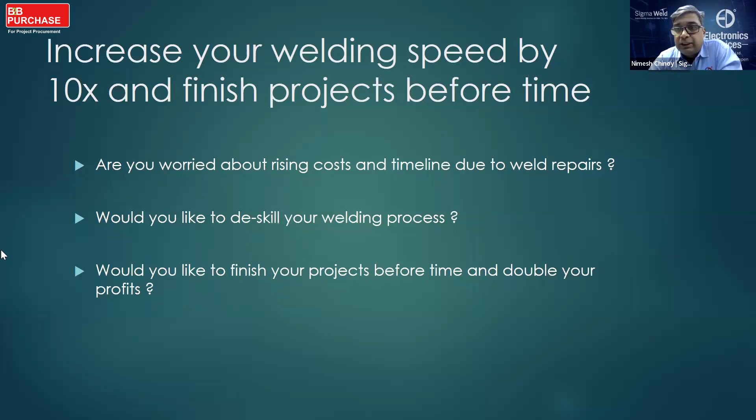If these are few things that worry you - worried about rising cost and timeline due to weld repairs - would you like to de-skill your welding process? Would you like to finish your projects before time and double your profits? If this is something that interests you, then we'll probably be at the right place.

Quickly, this is for production heads, factory managers, welding engineers, owners of stainless steel and exotic material fabricating companies who are into pressure vessels, limpets, dish ends, cryogenic vessels, aerospace components kind of welding, and anyone welding long seam or circular seam with GTAW process. So our focus today would be on TIG welding.

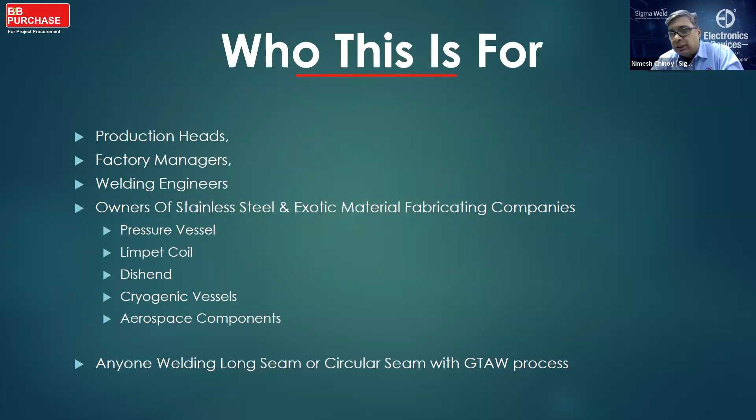What are we promising you today? At the end of this session, you should be able to bring down your welding time by about 90%, bring down your welding repairs by 99%, bring down your welding consumable cost by about 85%, and save more than 75% on your welding cost per meter.

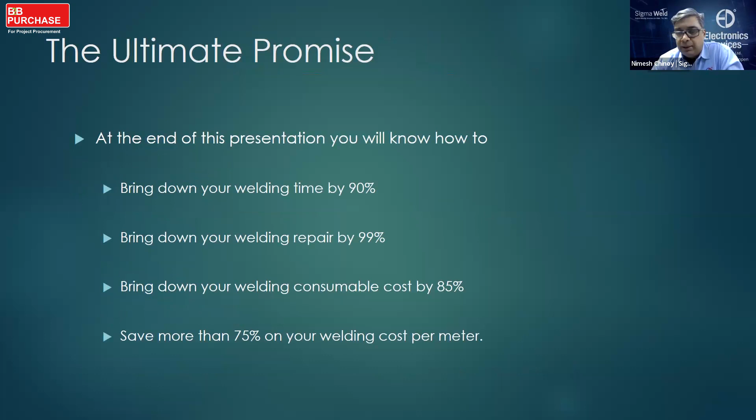A little bit about me - I think Sashi has already shared. I have got more than 20 years of experience in application engineering, in the field of welding and induction heating. I've authored more than 100 technical papers on welding, which have been published at various national and international conferences. I've been awarded the best welding technical paper at the National Welding Meet, and our paper on aerospace welding was selected for the Welding World magazine. I'm also the Honorary Secretary of the Association of Welding Product Manufacturers of India. I represent the Bureau of Indian Standards, the Electric Welding Equipment Sectional Committee, ETD 21, and I'm the Industrial Corporate Member Representative for the Indian Institute of Welding, and I'm on the Core Committee of Welding for the Confederation of Indian Industries, CII.

Very quick about the journey of our company, Electronics Devices, established in 1974 and all the way up to 2023. We've been always innovating and adding new products, from dielectric preheaters to induction heating equipments to induction cap sealers in India. We had a JV with an Italian company for induction heaters in '91. Today we fully own that company and have an export presence in about 80 countries.

We established our full-fledged R&D department in the year 2000. In 2007, we launched the first set of India's digital welding inverters under the brand name of Sigma Weld. In 2010, we extended our manufacturing capacities from Mumbai to Umargaon, which is a part of Gujarat. And we professionalized our company in 2012 from a partnership to a private limited company.

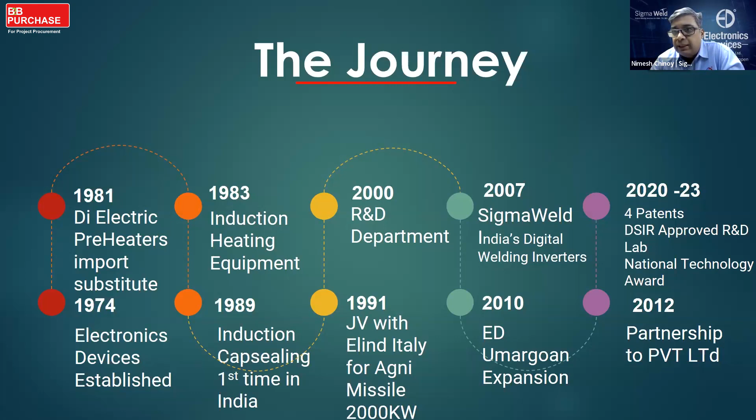I'm happy to say that over the last couple of years, we got more than 4 patents. Our company has been awarded and recognized as the DSIR approved lab by the Government of India, that is the Department of Scientific and Industrial Research. And we've won the National Technology Award this year.

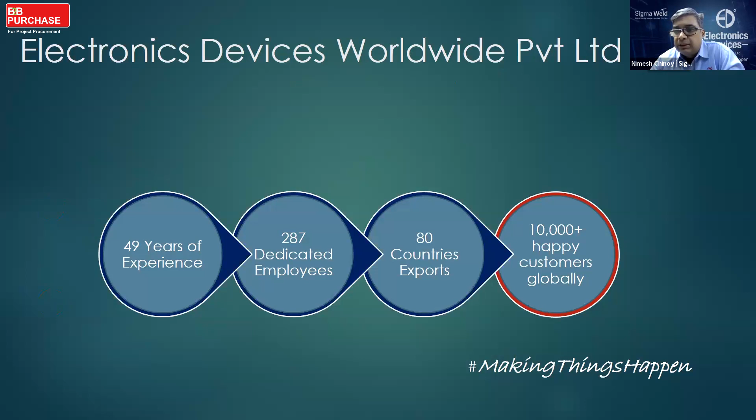In short, 49 years of experience for Electronics Devices, 287 dedicated employees, 80 countries plus exports, and 10,000 plus happy customers globally. A few of our contributions: Chandrayaan 1-2 solid fuel boosters welding was done by Sigma Weld equipments.

The Gaganyaan semi-cryo engine heat treatment procedure is developed by us. The titanium bundles welding and end-pin pre and post weld heat treatment used for all 6 nuclear submarines guarding Indian waters were done by us. More than 100 kilometers of welding of aluminum foot-over bridges for defense.

All the safes and lockers used by Godrej have been manufactured on Sigma Weld since 2007. Nuclear end-shield welding automation for the NPCIL, and critical repair joint for the first PFBR Bhavini project, which is a nuclear power plant - that project also we've done some major repair work for them.

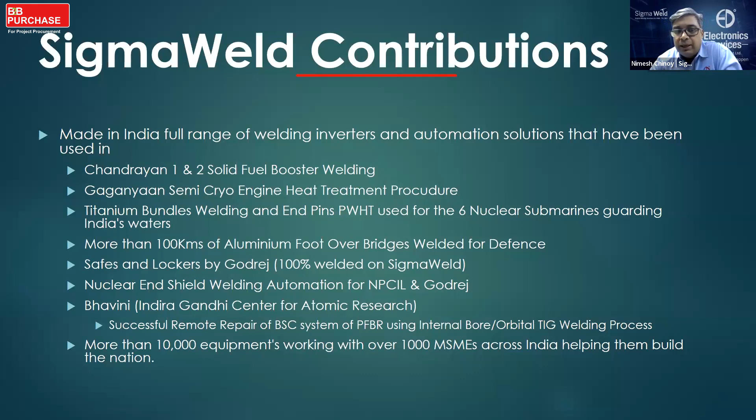Let's come back to our topic for the day, that is looking at TIG welding and its advantages. We all know that it's one of the best processes. It's very clean, one of the best processes, one of the most good-looking beads you can get, with no spatters. You can weld in all positions, and it's possible to automate.

However, we always talk about TIG welding being slow, lacking arc stiffness, having low depth of penetration, and increased heat affected zone. You need a very skilled operator, and you have stub-end losses, that is 10% of your consumable thrown away because the operator cannot feed it in time. Therefore, the process is considered or deemed to be expensive.

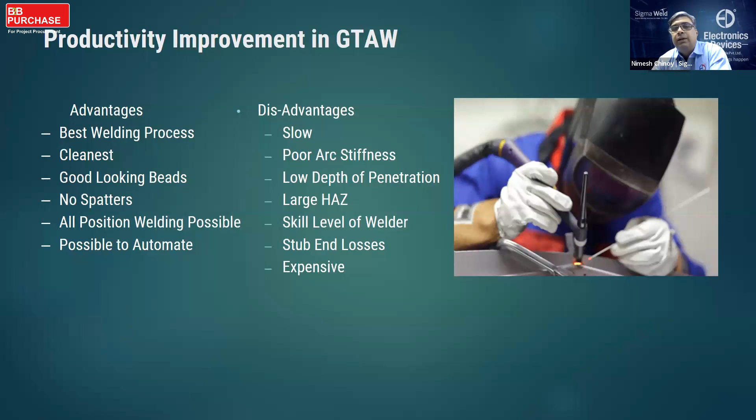When you decide to do any kind of welding on a plate or a rolled shell, you have to make an edge preparation, meaning you have to spend time creating the right bevel angle and root face. If you do it manually using grinding, it's normally slow with inconsistent root faces. But if you do it with a machine, that is a beveling machine or a milling machine, you will always have consistency on the bevel angle and root face, and by doing this, you will always be able to save time.

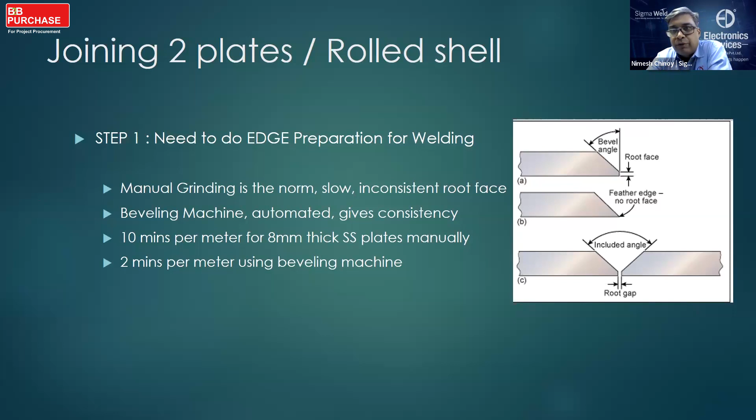For example, if you're using manual grinding for an 8 mm thick stainless steel plate, you would require around 10 minutes. But if you did it with beveling equipment, you would do it in under 2 minutes. So first, if you do it with equipment, you always get consistency and save a lot of time. Second, once the step is ready, you need to weld.

Manual welding speeds are typically in the range of 60 to 200 millimeters a minute with a little bit of automation. The filler wire required to do this is close to about 350 grams per meter for an 8 mm thick plate. It's a small calculator.

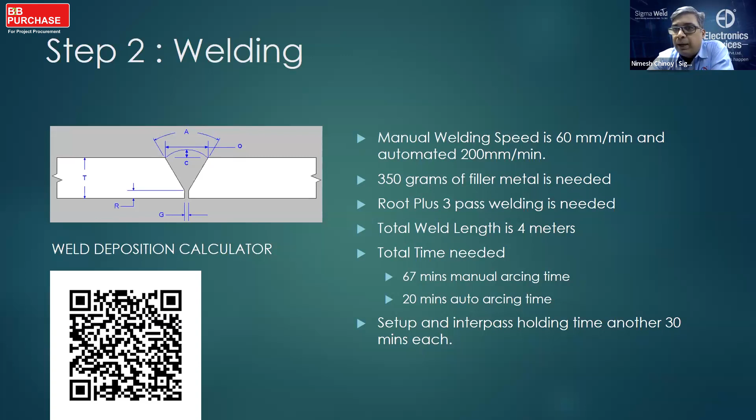Typically, if you want to do a 1 meter weld for an 8 mm thickness, you need 3 passes, root plus 3, that means a total of 4 passes. So 1 meter results in 4 meters of welding. Total time needed is 67 minutes by manual and 20 minutes in automation. Setup time and interpass holding time, another 30 minutes each, will be required because you cannot weld consecutively back to back, otherwise you have overheated material and it can bend or distort.

If you move into semi-automatic GTAW, you can start feeding with a wire spool instead of using cut lengths of wire. It helps you have a single roll instead of multiple dimensions of filler wires. It avoids frequent start-stop of the filler wire, and it avoids post-weld grinding of the overlaps. Most of the failures you get, that is lack of fusion, lack of penetration, happen at overlaps. So if you reduce overlaps, you reduce your chances of failure.

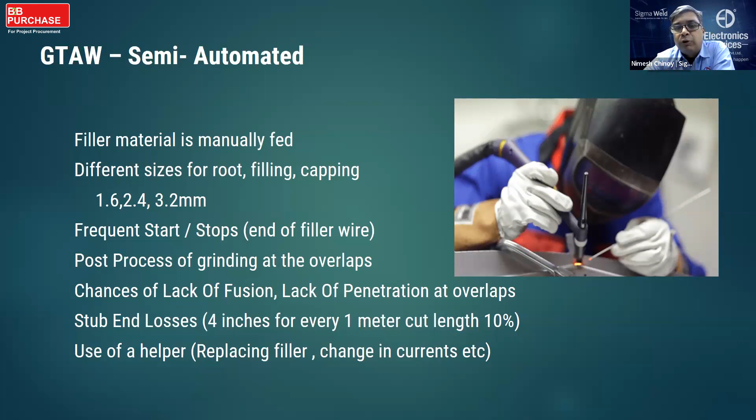You have stub-end losses. That means for every 1 meter cut length, you lose about 100 millimeters or 10 centimeters because the operator cannot reach the arc that far, and therefore that's 10% of your cost of consumable throughout the project. Also, you need a helper to replace the filler wires or change currents.

Let's consider one project for you. If you were to make a storage tank of 1.6 meter diameter and 10 meter length, as you see in the bottom figure, you would have 5 segments to weld of 2 meters length each and 1.6 meter diameter. This means you would have 6 circular seams to be welded with a total weld length of about 160 meters, and you would have 2 meters into 4 passes each, as discussed before, for 5 seams.

This gives you 40 meters of weld length on the long seam. And for the circular seam, 1.6 meter diameter, it would consume 1.6 into 3.14 into 4 passes each into 6 seams, giving 120 meters, so a total length of about 160 meters. Manually welding this would take close to 44.6 hours. If you do it with automation, it would take about 13.33 hours. So this is the difference you will get.

To add to it, filler material required is about 56 kgs. 10% of this, if you were doing manual, that's 5.6 kgs, would go to waste. So you would have to buy more than 60 kgs to actually deposit 56 kgs. The number of machines to be added, and number of skilled personnel, would depend on the number of tanks you have to make.

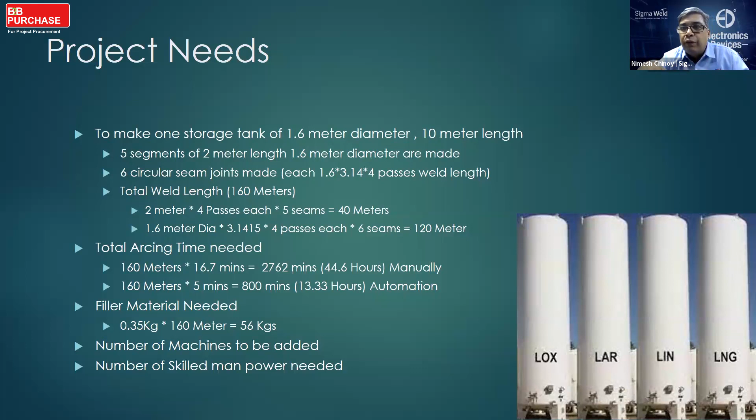You can assume if you are only able to produce one shell in 13 hours, plus you need to wait an equal amount of time for the interpass, that means 26 hours of arcing time, close to 4 to 5 shifts of welding time required per job. But this still takes a lot of time considering edge preparation, welding with filler wire.

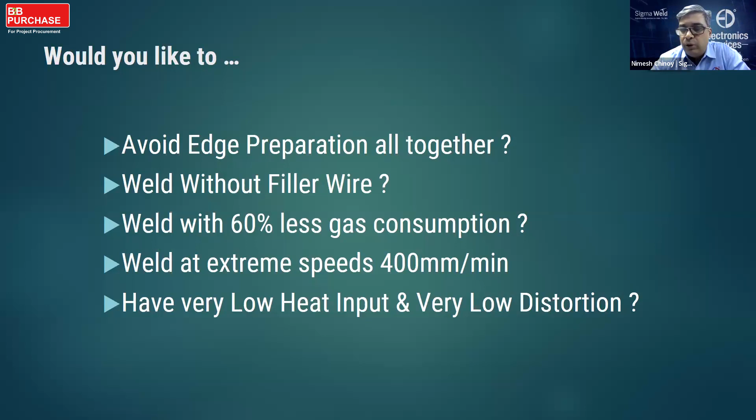We can do something called keyhole TIG welding. When you do keyhole TIG, the arc is constricted, you get a more focused area and deeper penetration. The arc is so focused that you get 3 times the arc force required. Therefore, you have larger penetration and lower heat input.

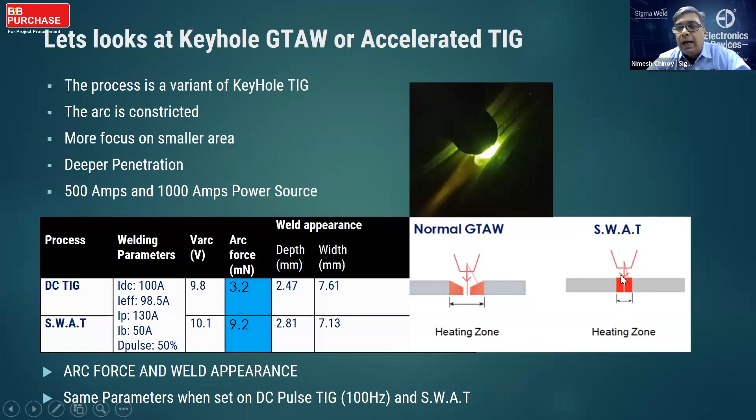This is how it works. You need a torch, and you need square butts on two plates. As they move forward, you will have a keyhole punctured right through. There will be protection on the bottom with purging gas that holds the bottom together, and from the top, using surface tension, the molten pool will move further. Because you are not adding any filler wire, the base metal and the weldment have the same tensile strength. So it's very good.

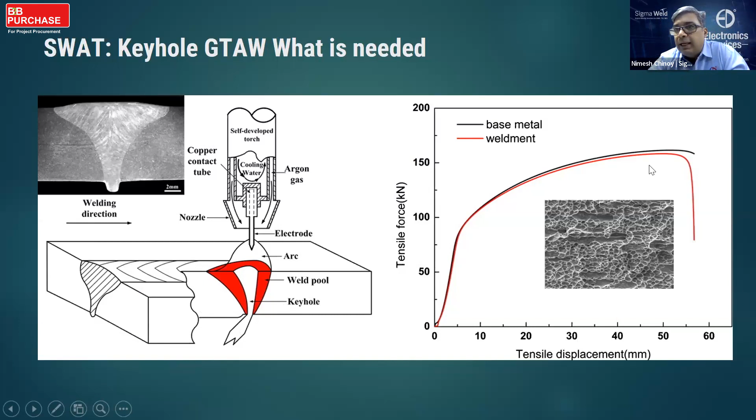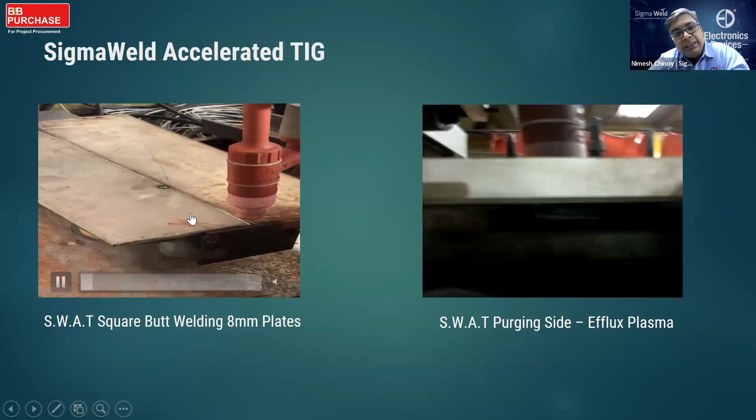A quick video to show you how this looks in real time. This is the top version. You can see there's an 8 mm plate, no edge preparation done. A normal simple torch, as you can see, water cooled, no clamping. I'll just fast forward this a bit for you.

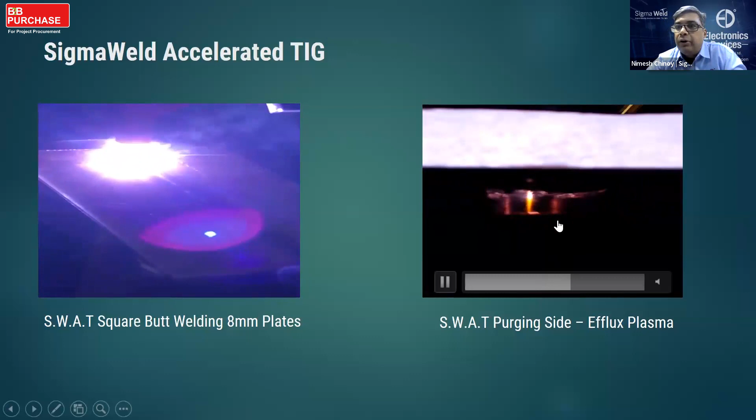You can see this is working at about 400 millimeters a minute. On the bottom, on the other side, you are seeing gas exit from the bottom. This is what is called efflux plasma, which shows you that the penetration is full and complete, and it releases all the gases from the bottom side. Once the welding is complete, you can see a full, clear penetration joint, and this helps you avoid any kind of confusion at all.

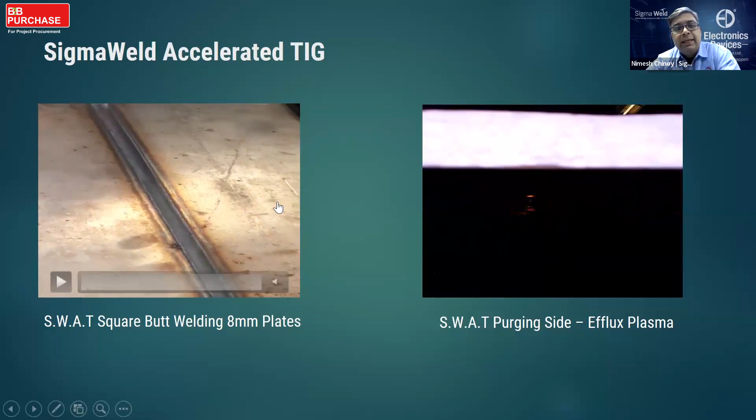This can be used for long seams, circular seams, tube mills. You can weld stainless steel, duplex stainless steel, titanium, nickel alloys, stellite alloys, and to a certain extent carbon steel, all in a single pass up to 10 and 12 millimeters.

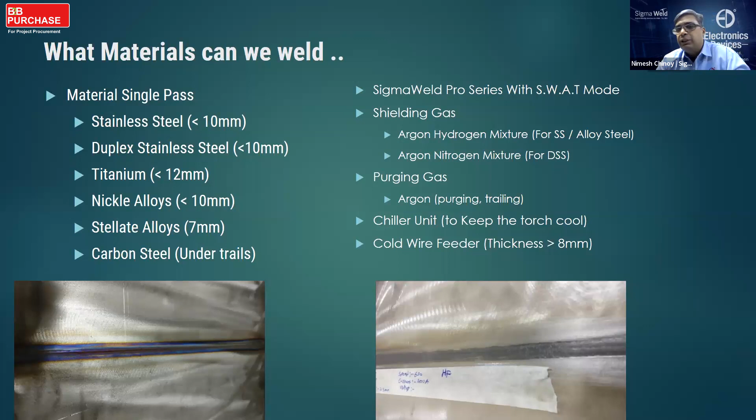What you will need is a Pro Series equipment from Sigma Weld with a SWAT mode on it. You need to choose the gas - argon-hydrogen mixture for stainless steel or alloy steel, argon-nitrogen mixture for duplex stainless steel or super duplex. Purging gas can be argon altogether. You can use a chiller unit to keep the torch cool if you're welding longer seams together. And if you're welding more than 8 mm thickness, we'll use a cold wire feeder to add a little bit of wire to take care of the undercut or underfill.

These are speeds that we have tabulated. For Hastelloy, they are about 550 millimeters a minute for a 6.5 millimeter thick plate. For stainless steel, we've done the whole schedule 10, from 2.72 to 8 and 10 millimeters, and you can see the speeds gradually going up. At 8 millimeters, we are at about 400 millimeters a minute. And for Weldox, we are still doing about 400 millimeters a minute at 8 millimeter thickness.

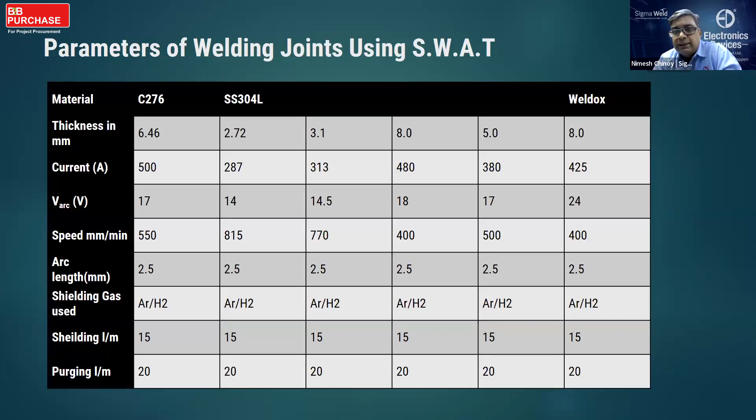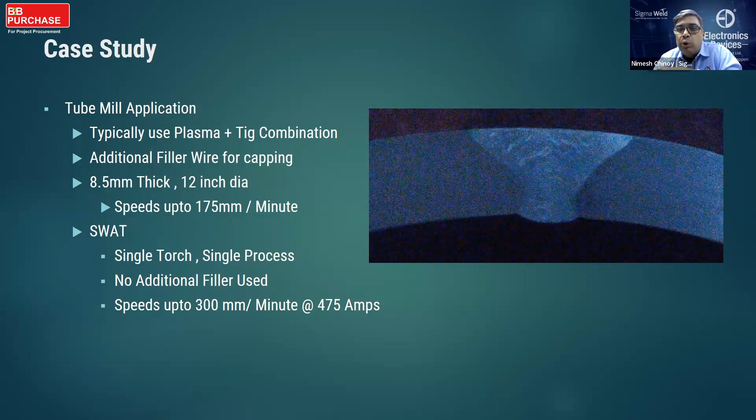For the tube mill application, we were able to help our client increase the speed for an 8.5 mm thick, 12-inch diameter pipe from 175 millimeters a minute to 300 millimeters a minute. With this, you were able to avoid the filler wire altogether and yet get RTR joints 100% of the time. These are a few photos of the joints concluded.

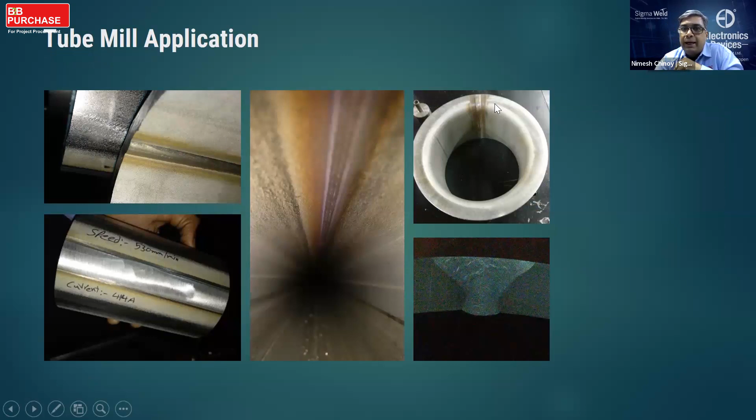This is for a 5 to 6 mm thick pipe. You can see the weld bead penetration. This is the top bead. Flaring test passed, and here's a micro of the same section.

If you were to do a long seam by normal manual welding process, TIG welding about 8 mm thick SS, it would take close to 102 minutes - considering 30 minutes for edge preparation, manual welding speed of 55 millimeters a minute, and root plus 3-4 passes to weld, about 72 minutes of weld time.

For the same thing with an automated process using auto TIG, you would get root plus one pass - done in two passes at 100 millimeters a minute. Edge preparation of 30 minutes, welding time 20 minutes, total project time 50 minutes. For the same thing with SWAT, you can do it in a single pass at 300 to 400 millimeters a minute, with no edge preparation time required.

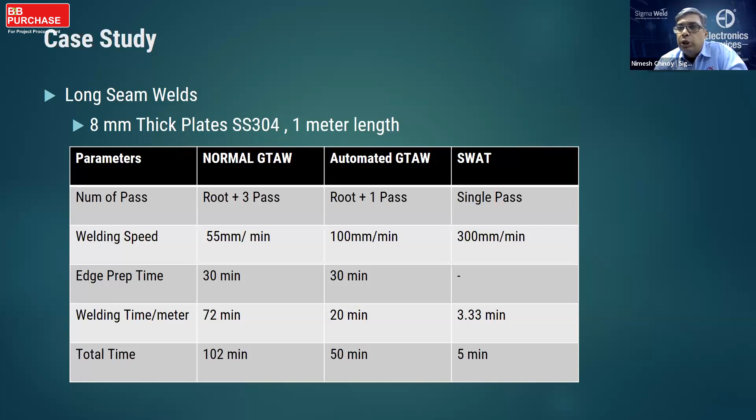Welding time is hardly 3.33 minutes. Total time, including clamping or tacking, is 5 minutes. You reduce your time from 102 minutes to just 5 minutes.

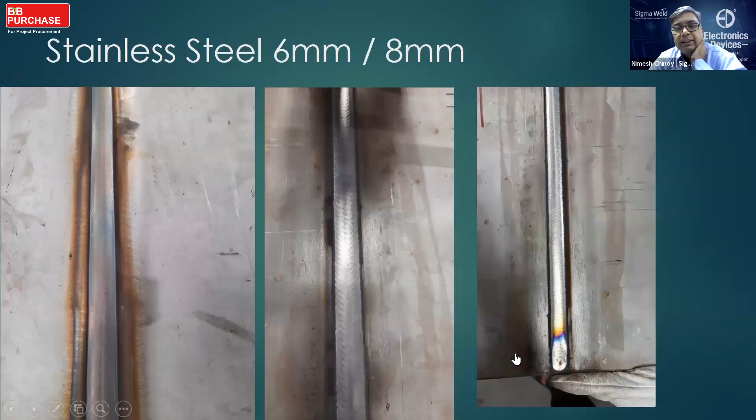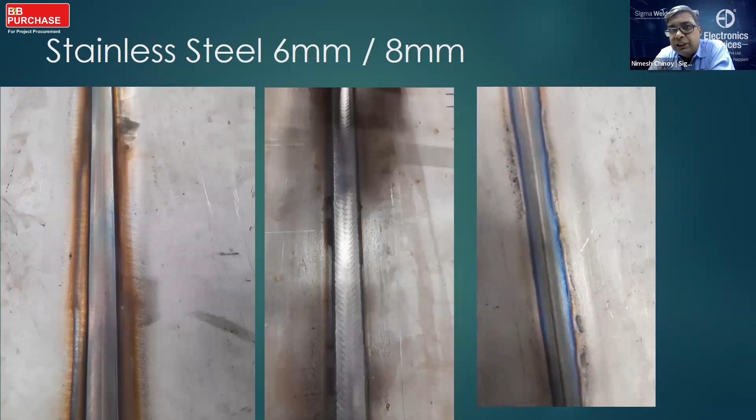Let's see what some of our customers have achieved by doing this. This is for a customer using stainless steel, manufacturing stainless steel long seams, plate to plate. You can see the weld finish, achieved at about 400 to 450 millimeters a minute, on a 6 mm thick plate. Root, RT, and other tests were passed as per section 9 of ASME code. This is the bead finish you can get.

This is for a customer doing cryogenic vessels. They had a 6 and an 8 millimeter thick shell, single pass, no edge preparation, X-ray quality weld, including impact testing at -196. They were able to reduce their consumable wire consumption by 90%, and the entire shell, a 1.6 meter long shell, was welded in under 4 minutes.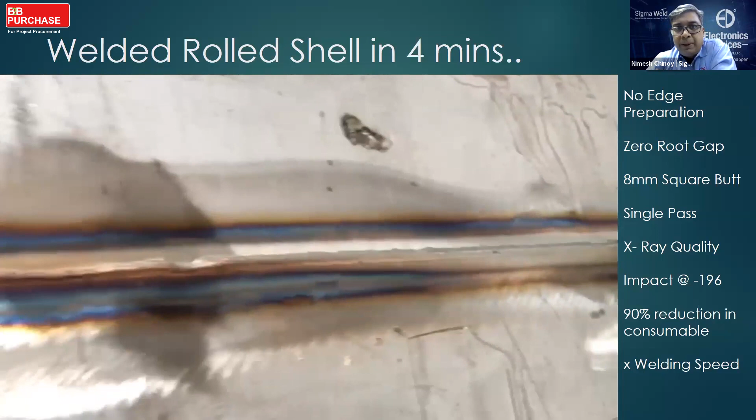Let's compare data for about 10 mm thick plate. Using an existing TIG welding process, you would need 6 passes to do it. Using SWAT, you could do it in a single pass. Using filler metal, you would need about 1 kg with the old process; here you would need only 100 grams.

Cleaning would need about 60 minutes; here you need only 10 minutes per pass for the first pass. Weld edge preparation saves you 100% of the time. Shielding gas saves about 60%. Total cost per meter saves 70 to 75%. In addition, you get a 30 to 40% reduction in heat input, which helps reduce the heat affected zone and distortion on the plate.

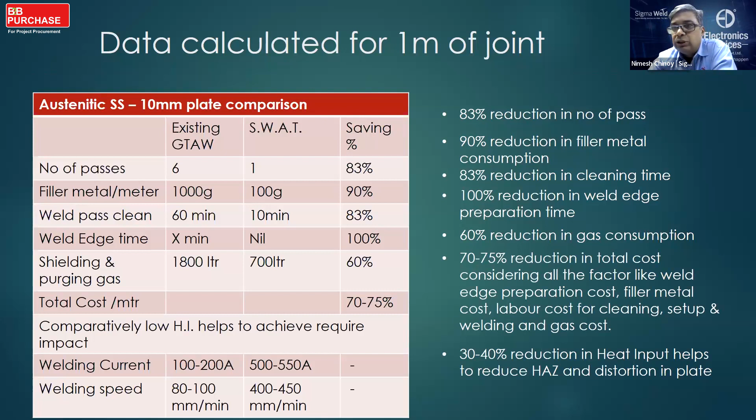Same example for titanium. One of our customers was able to produce 6 vessels well before time, and received their ROI well within the project itself. They welded more than 200 long seams within a span of a month. You can assume titanium is very, very difficult to weld and takes a lot of precaution, but this is the result achieved by them.

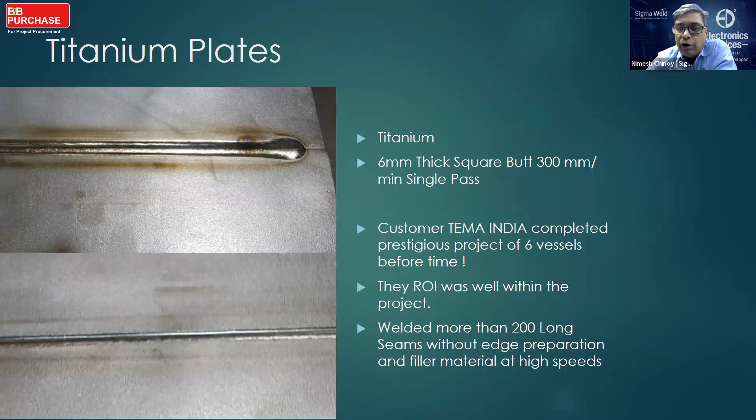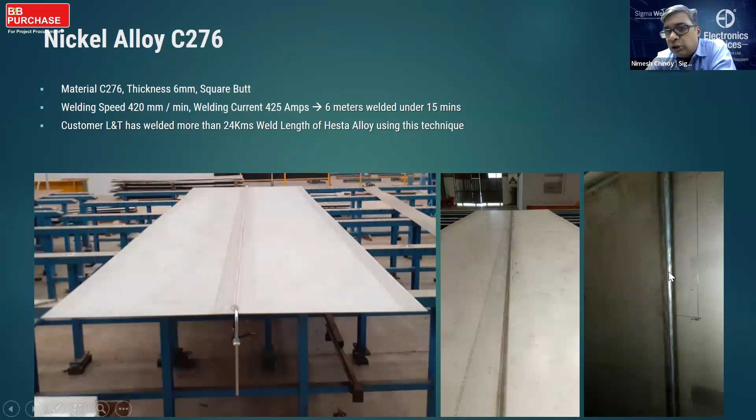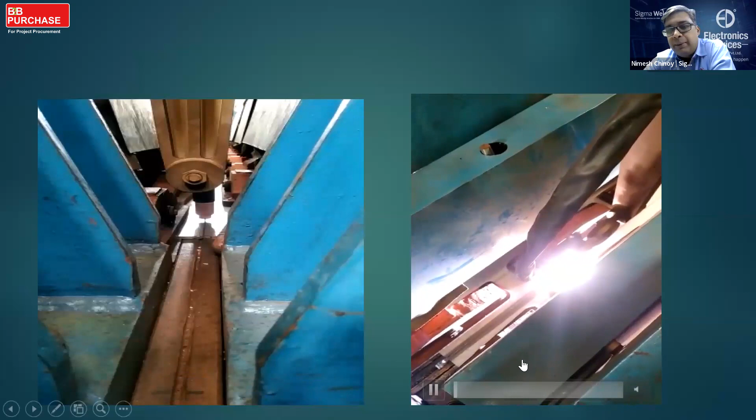There's another client who achieved a 6 millimeter thick Hastelloy alloy C276 plate, 6 meters long, in under 15 minutes. This is the plate before welding, after welding, and the root penetration. There is no distortion on the plate, producing speeds of more than 420 millimeters a minute. This is one of the same plates welded, showing the actual fit up and welding procedure, being welded at the actual speed of 420 millimeters a minute, and you can see absolutely no problem.

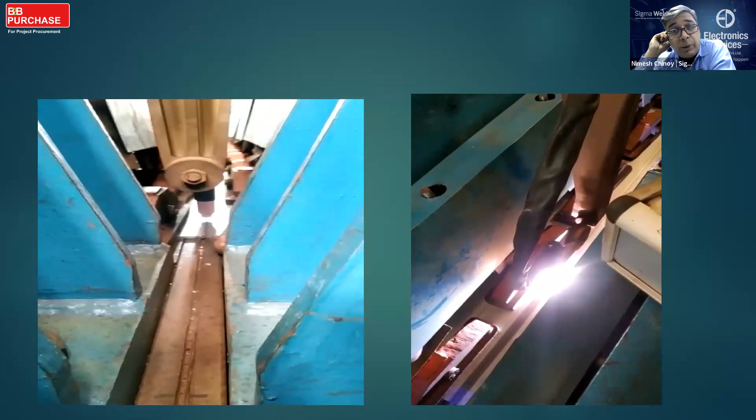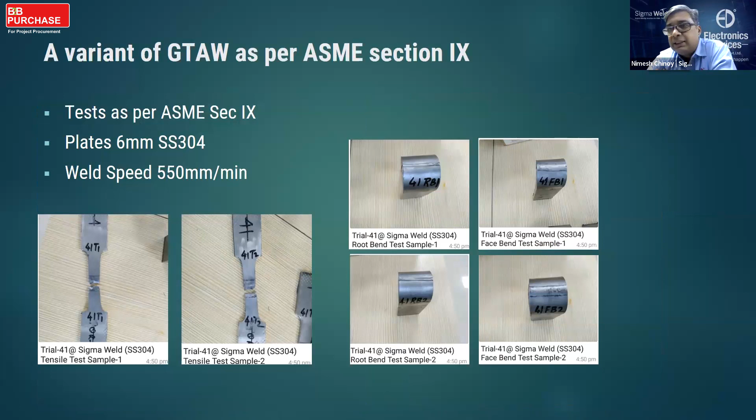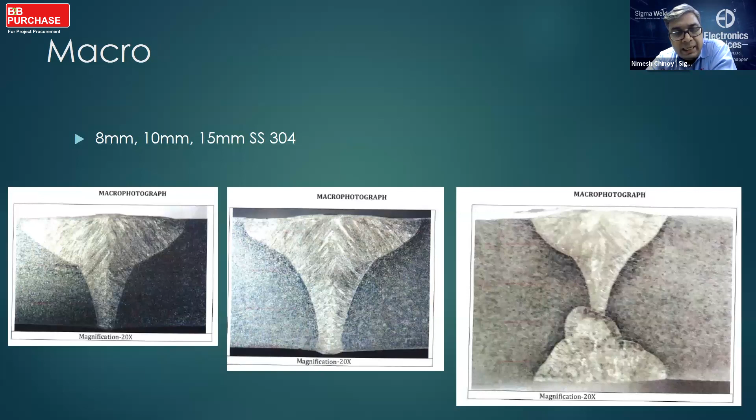The customer has, in the last 3 years, welded more than 24 kilometers of weld length using this process. It's a variant of GTAW, so as per ASME section 9, it has undergone tests for root bend, face bend, and tensile, and it passes all of them, including impact testing at -196. Here are a few macros, 8 millimeter, 10 millimeter, and 15 millimeter thick, and you can see very clean, clear results, exactly what you need.

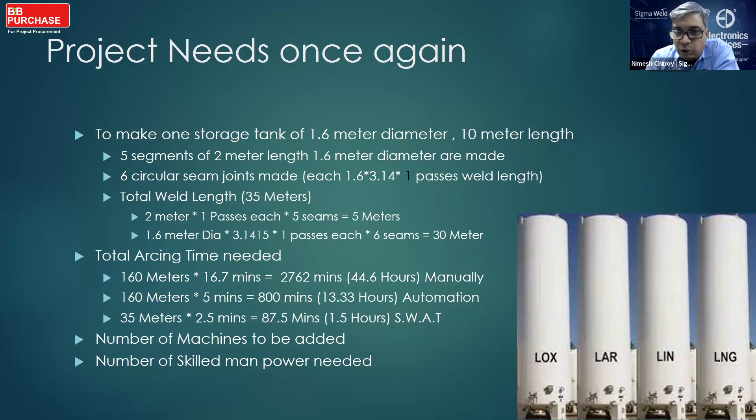Let's look at that number again. The arcing time required for manual welding was 44.6 hours. The arcing time required for automated welding was 13.33 hours. The arcing time required now is 1.5 hours. This is at least 30 times the speed improvement you could achieve.

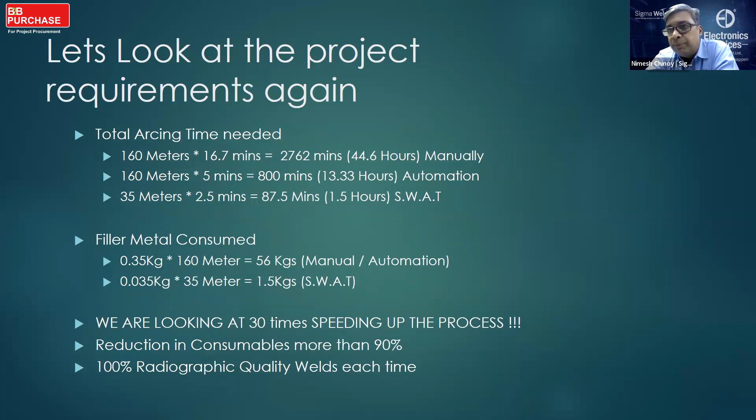Filler metal required was about 0.35 kgs, that is 56 kgs in manual or automation. In SWAT, you would only need about 1.5 kgs to do this job, so you can imagine the kind of savings out there. You're looking at speeding up 30 times the process, reduction in consumable more than 90%, and 100% radiographic welds each time.

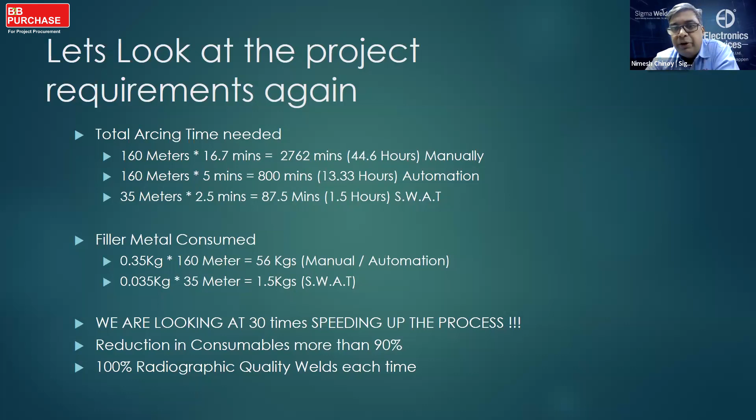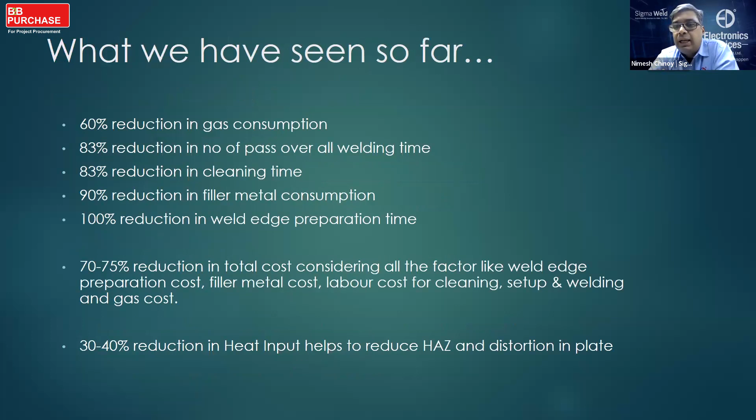With this, you have two choices. Either you keep adding more machines and skilled manpower to encash the present order book at existing higher cost, or miss out on the opportunity to grow fast, or let us help you accelerate your TIG welding and capitalize on low cost, high production, high quality welding growth.